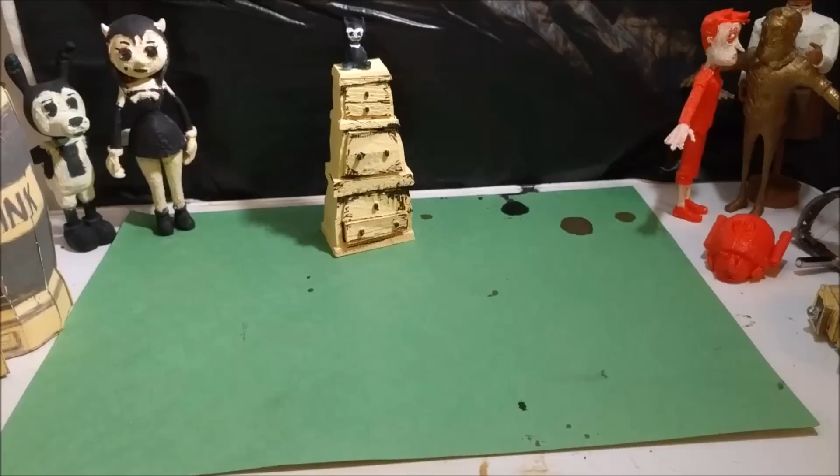Okay guys, I printed the dresser drawers and I'll show you that I made the bottom one removable.

Let me think. So Henry, what's behind drawer number one? Bendy plush. What's behind drawer number one? Alice, why is your halo in here? You need to put your halo back on, Alice. What else is in drawer number one? I think there's a book in there. Why, yes, it's The Illusion of Living by Joey Drew. You know, I once had a delusion of living. Bada bing, bada boom. Tough crowd, tough crowd.

Now for the gory details. The dresser drawers from Bendy - I'm going to 3D print them, but I'm not going to make all these drawers removable. Only the bottom one am I going to modify the design so that it can actually come in and out, so it looks a little more authentic.

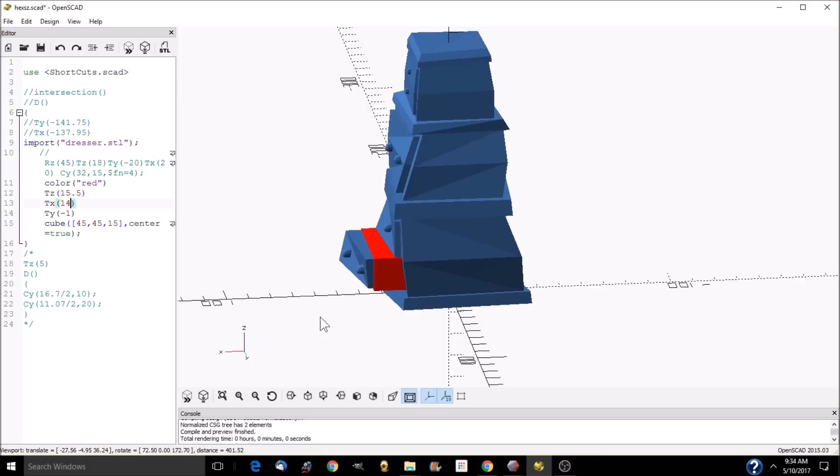So what I have to do is cut out this bottom drawer and print it separately. There's a million different ways you could do this. I'm just guessing where it's located in here, and I'm going to do a difference with OpenSCAD.

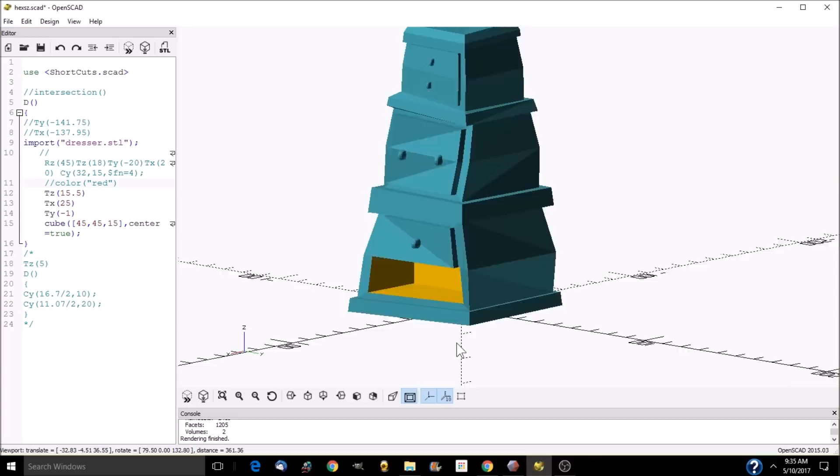Okay, so there it is with the section cut out. I will print this as one model, and then print the drawer separately. So let me do an intersection and cut out, and there's the drawer all cut out. I did an intersection and then a difference to put in the hole inside the drawer.

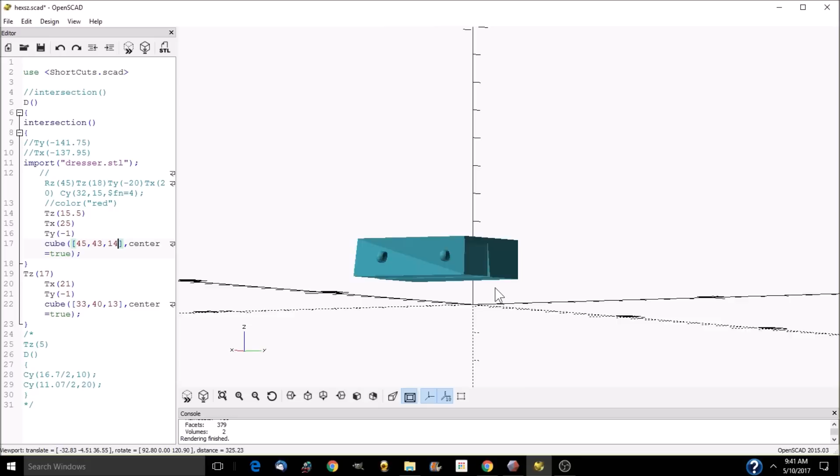And I know it overhangs a little bit. That's because these drawers are actually crooked and my cube is not. So there it is with the drawer missing.

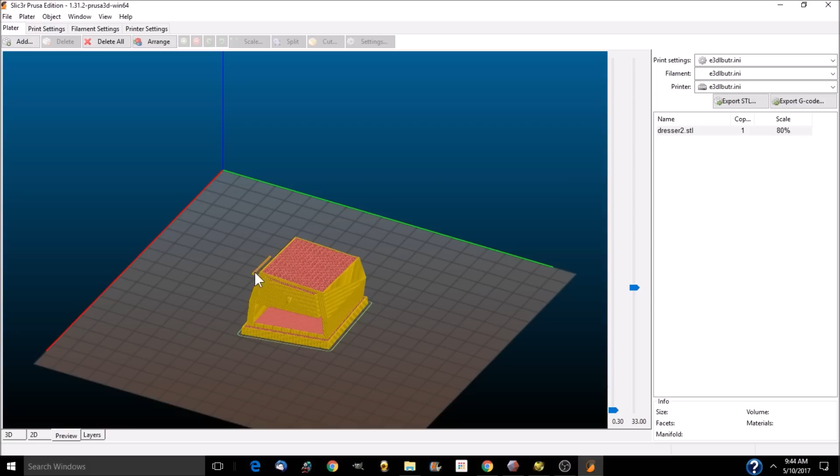If you printed this upright, you would have all these overhangs that you'd have to support as you printed them. Anytime you have something like this, it is going to air print - meaning the filament has nothing to fall onto. Gravity will pull it down and it will look ugly. So one thing you learn about 3D printing is either you put supports all over the thing, or you cut it in such a way that you can put it together without supports.

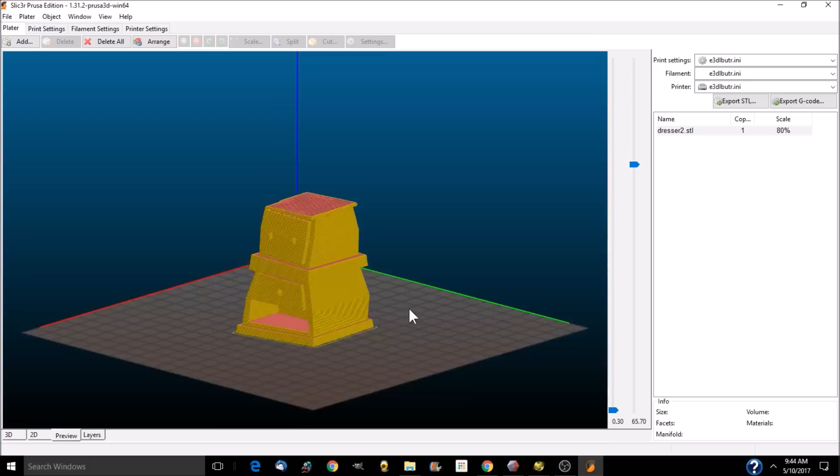And that is why I do that a lot. This underneath here, it would air print. You could try to bridge across there and cool it off so it doesn't sag too much, but you'd probably have problems doing that. So I will cut it.

And to cut it, we do this - we rotate it around the y-axis, I guess, by 90 degrees. See, I think I got to do both x. Okay, there you go. Now that it's on its back, you could support just the whole back, but that would be a lot.

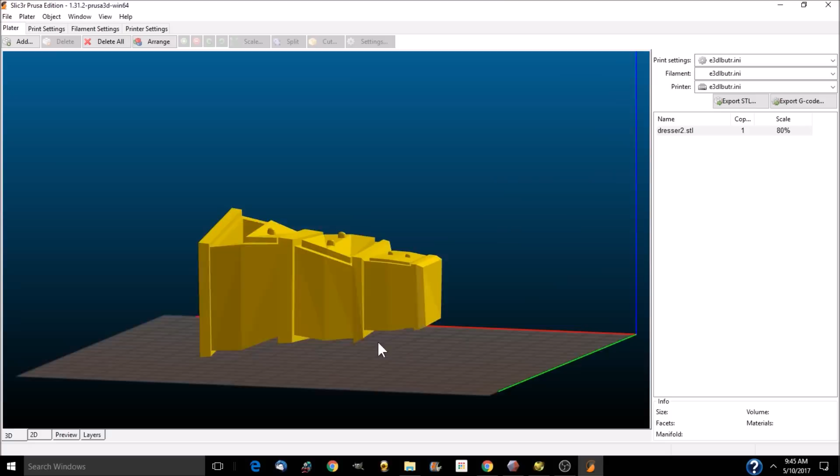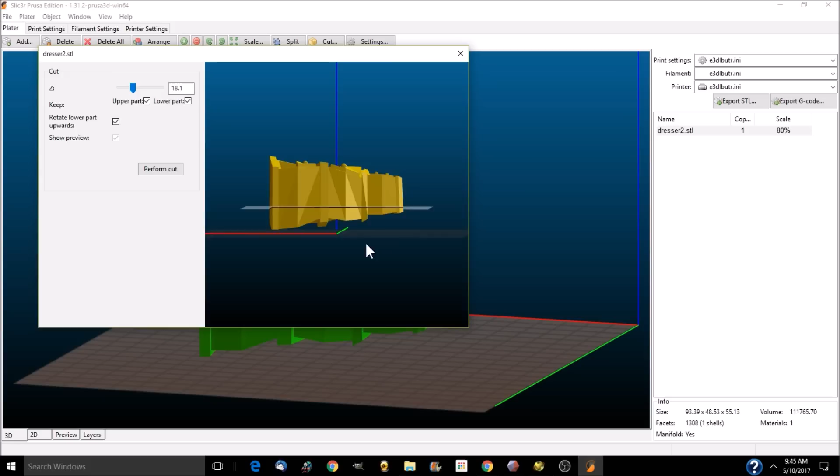For now, I'm going to cut, and we find roughly the center of this. Looks like about 27, maybe a little lower. Actually, what I'm going to do for now is print it like so, ignoring the back. If I feel like it, I'll print the back at another time. It's no big deal - I could put the back on later, or just push it up against the wall and nobody will know.

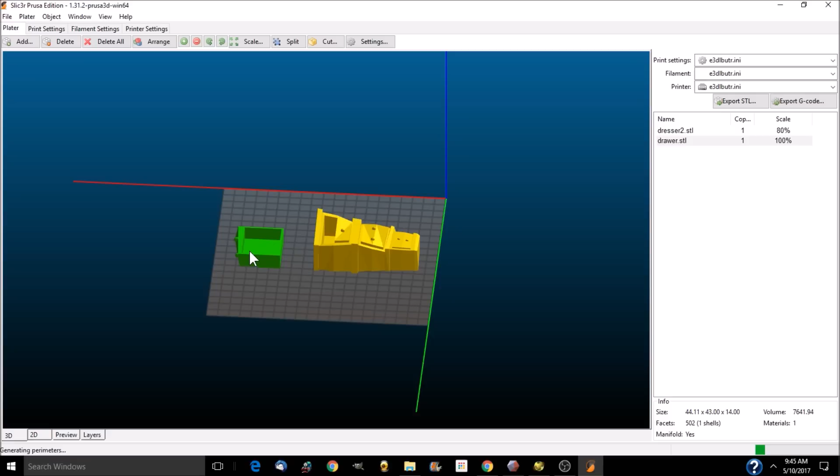Perform a cut. All right, like I say, you can get rid of this - I could have told it not to use it in the first place. And then I'm going to add my drawer and make sure it's the right size, which it's not going to be because I scaled this to 80%. So I'm scaling that to 80%, and that's what I'm going to print.

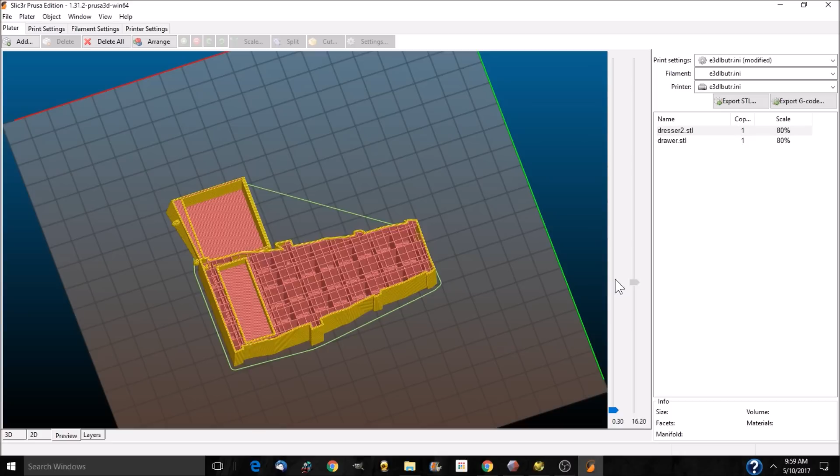Okay, something I'm going to try in the slicer program is add a modifier so I can print less infill at the bottom, and then when I get up to where I'll need some support, I increase my infill. We're going to try that. I also change my layer height - I know there's a new setting once I get the newest version of Slic3r, but right about here I changed from 0.3 to 0.2 to get a little smoother detail on the drawers.

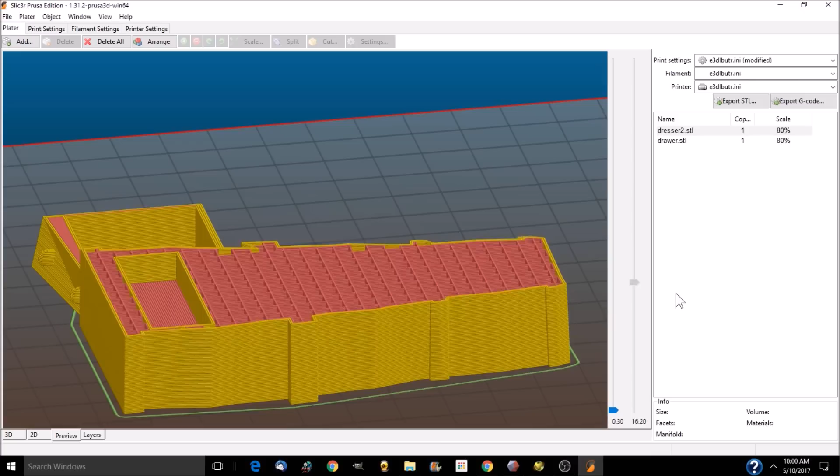Could be a lot lower. I still want to print this kind of fast, so that's why I did that. So that's what it's going to look like, hopefully. Let's throw it on the printer.

Time lapse with my big heavy cell phone. Yeah, I got to get a dedicated camera so I don't have to keep taking my cell phone off and missing some of the print.

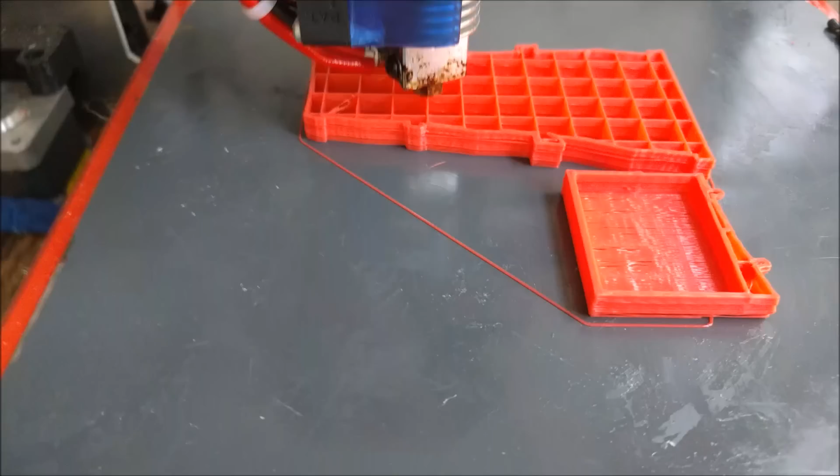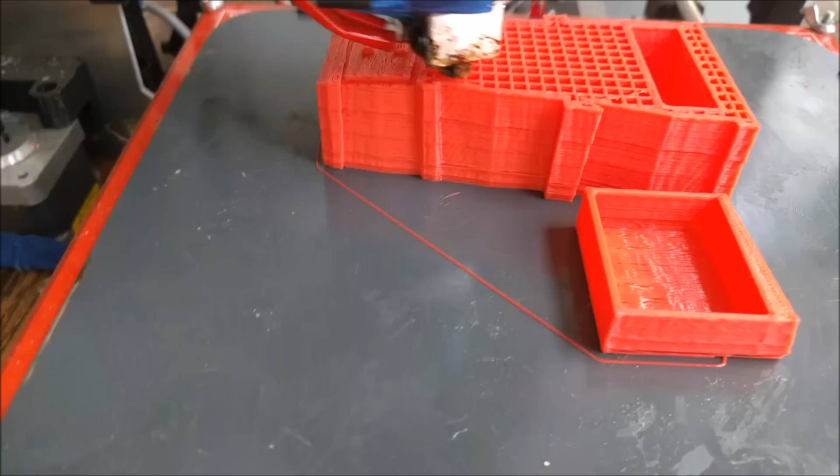The extra infill did a pretty good job. It's way too thick - I didn't need to do this as thick. I used way too much plastic, and it took over an hour to print. Anyway, I didn't end up with saggy drawers, and that's a good thing. Yeah, we don't want saggy drawers. Not on my videos.